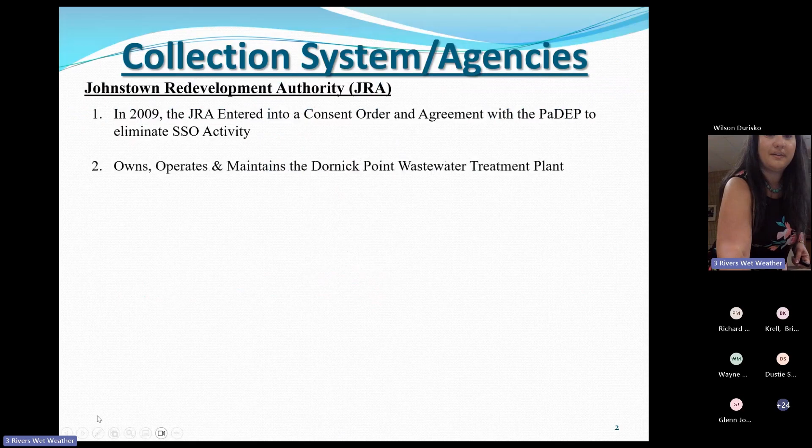So the first few slides will give us an idea of the makeup of our system and where we are. The beginning talks were in 2009 with DEP. And as Dave mentioned, although we're a redevelopment authority, we're also Johnstown Regional Sewage. So as of today, there are 21 municipalities that flow into Dornick Point. Whenever we think about working within the communities, obviously everybody has different demographics, different political makeup, and we had to work very diligently with all the municipalities in order to get everybody on the same page. And that took years. That wasn't something that happened overnight by any far stretch.

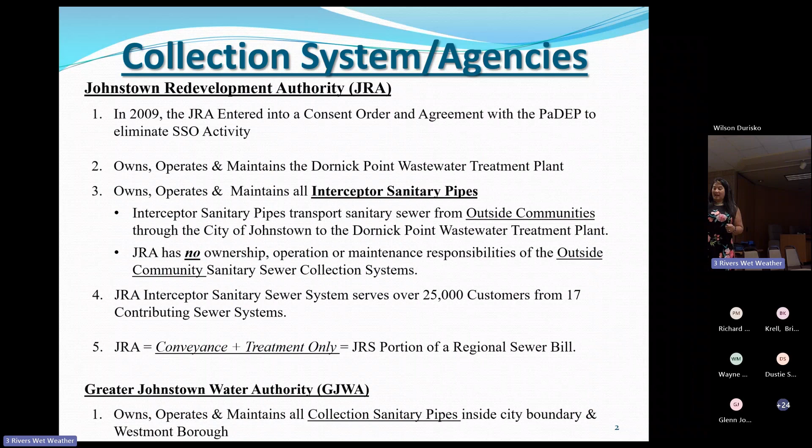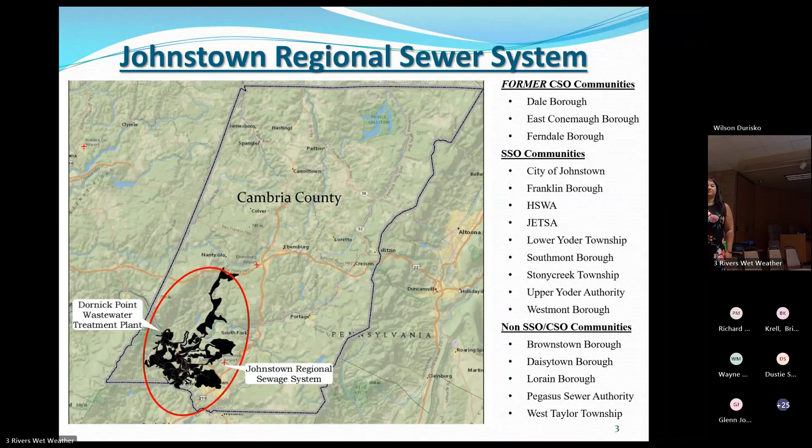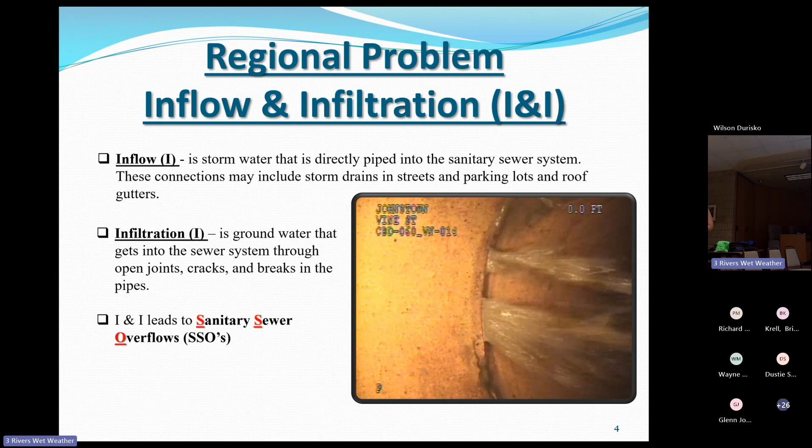So obviously the largest issue was the I&I. We're, a lot like a lot of your municipalities here, an old steel town. We had outdated infrastructure and just a lot of the lower demographics as far as household income. So we knew going into this that this wasn't going to be a simple task by any far stretch.

So whenever we think about the rain events, if anyone is familiar with Johnstown at all, whenever people say Johnstown, they instantly think floods. So first and foremost, with our residents, they're skittish of water to begin with. They have a lot of questions. We never know what to expect from week to week, month to month. And the rain events not only have caused issues in the past, but also have caused many issues through this project.

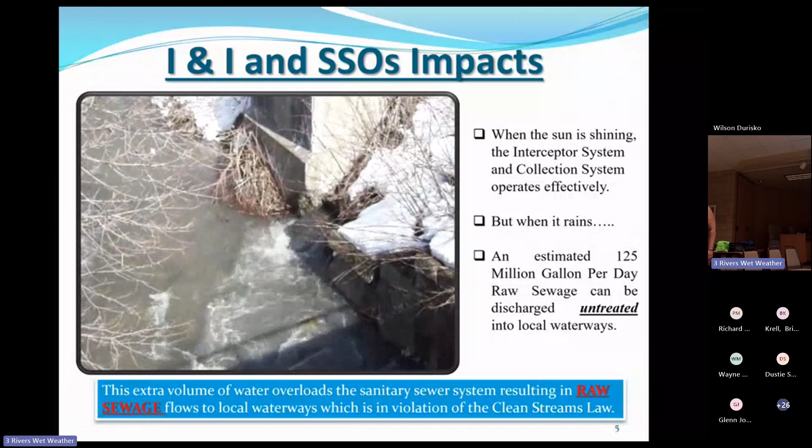So whenever we originally started with the consent order, the authority was the first group to sign the consent order. We worked with not only DEP, but with the member municipalities to all have their own individual consent orders, which did help immensely through this process once we were 4, 5, 6 years into it.

We had many public meetings that helped us a whole lot in order to get the residents on board, just to start to understand what this project was. Many of our residents, it's definitely different today, but at the very beginning, no fault of their own, they just didn't understand the process. They basically didn't know the difference between a storm and a sanitary line, or where the lines on their property went. Obviously, we were facing very large infrastructure projects, which caused issues just with travel from point A to point B.

We basically didn't go in painting a rosy red picture when we met with our municipalities. It was more, look, there's going to be a whole lot of issues and collaboration that we're all going to have to work through together. And I think a lot of that was successful from the word go, because we did sit down with our engineers, we sat down with the general public.

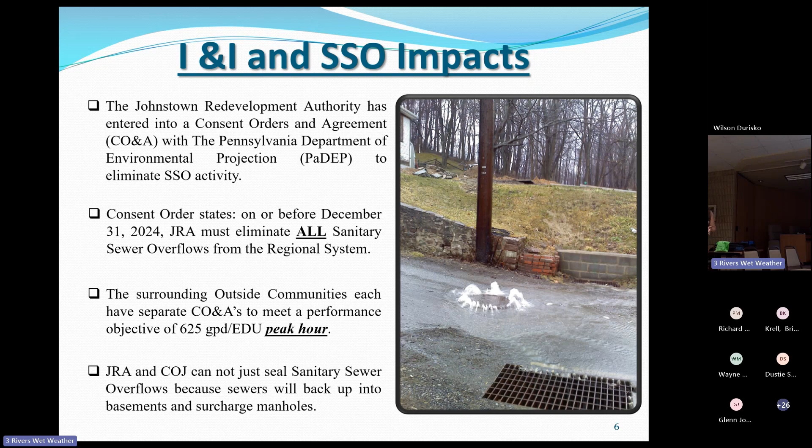Open lines of communication, newsletters were sent out. And some of those situations created more ugliness, because let's face it, sometimes the more knowledge we give, the more critical people can be. So, but we don't regret doing that. A lot at the beginning was very helpful just in providing the proper knowledge to our residents.

Throughout this process, and I'm sure all of you are doing the same thing, there was a whole lot of flow monitoring. Obviously very costly, but very worth it in the end. We were able to truly show where we were at the beginning of the project. DEP did ask in the consent order for us to flow monitor for a year. We monitored for 10 years and just halted that flow monitoring 2 years ago when mainline work was completed.

Now, since then, we actually did install 8 monitors at our SSOs, or we have 8 remaining SSOs, just to see the progress that was made, where we are today, and just to see how much more work we have to do.

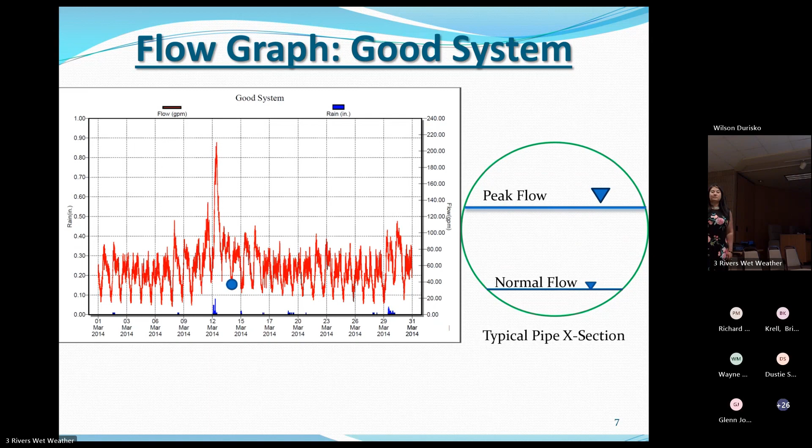So basically, at this point right now, we are fined a minimum of $1,000 a month through DEP whenever we have any gate closures at the plant, which at the absolute most, I think we've had 4 in 1 year. That also created the additional $1,000 fine for us. But DEP has continued to work closely with us to alleviate those issues.

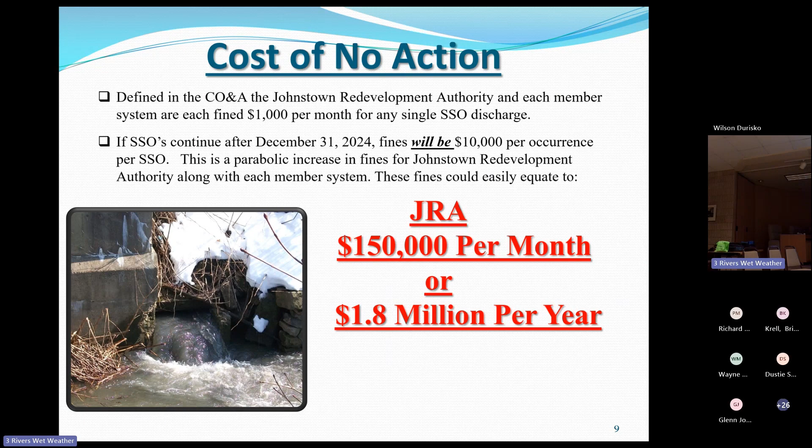But while we were presenting to the general public, we had to use these numbers. This is factual information that if we don't meet the DEP consent order, we could be facing these dollar amounts. And obviously, these numbers speak volumes whenever you're dealing with your residents and with the smaller municipalities that have fiscal issues, regardless of fines and mandates.

So we obviously did a whole lot of mainline work. At this point, just at the authority and PENNVEST, we have wonderful working relationships with PENNVEST. They've helped immensely through time. And whenever we talk about our private laterals, we had many discussions with PENNVEST also as far as funding sources, which once again, we'll talk a lot about at the conference.

But for as much as they were able to help on the public side, a lot of the red tape on the private side, we didn't feel was going to work for our residents, just based on prevailing wage costs, everything that goes along with PENNVEST dollars, which is why we had to be a little bit more creative.

But whenever we think about just what we were up against with the public versus private, there were times where a fourth of the city was under construction. We had 3 and 4 different construction projects all going on at the same time. So whenever we think about the frustration of our residents who are, in the city of Johnstown, your normal commute to work is 3 minutes, 5 minutes tops, just the traffic side of it, the construction side that took place, there was just a whole lot of tension on the project.

It was just everything was viewed as negative at that time. Now, all these years later, we do see the positives. We don't have manholes flipping during rain events. We don't have flooding in people's basements. So whenever I think about those initial discussions with the residents compared to where we are today, I know it seems like it takes forever to get to that positive end result, but we do notice that through the process with the public versus private work that we are seeing that.

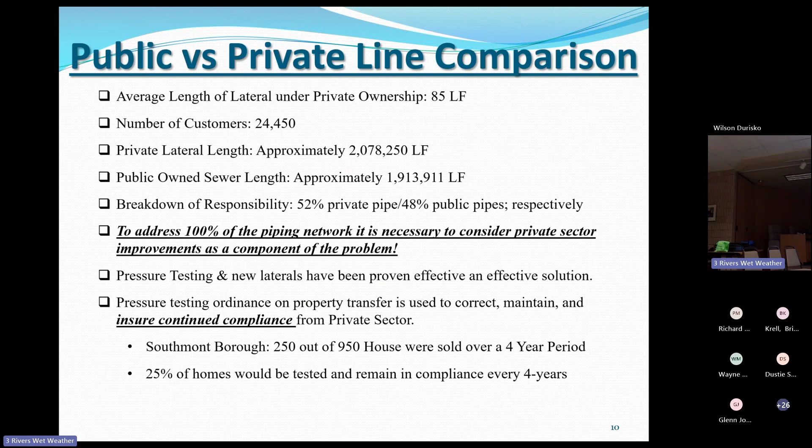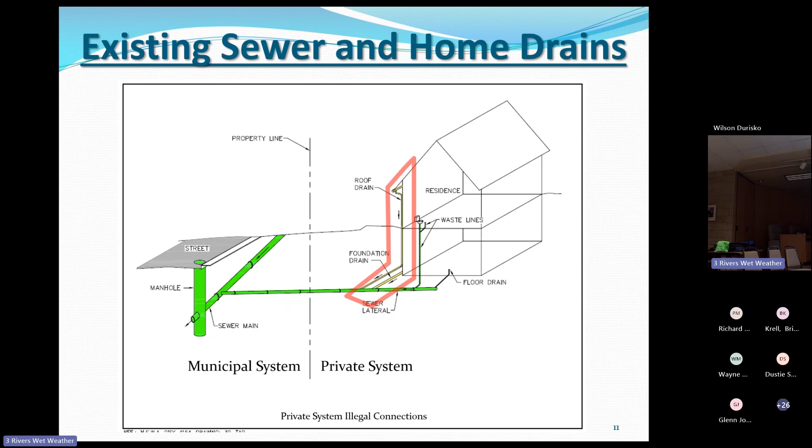So the next few slides are just a few different drawings, more generic drawings that we use with our residents. A lot of them were confused about the process, didn't understand. They thought they were going to have to dig up their entire basements, or change bathrooms on the second and third floors of their homes. It was a very ugly message at the beginning compared to what they actually had to do.

So we use these drawings a lot to explain what they were up against, what they had on their properties themselves. Another conversation I had with Dave is how we use viewports through all of our projects, which is the connection point between the private side and the public side. We did things a little differently based on the municipality and what their engineer wanted to see, but all of our projects have a viewport either at the property line, or for some municipalities willing to fund it, 5 feet from the foundation.

So we use that with all of our programs and municipalities as the point of public versus private. Going back to that last slide - is it the norm for communities in your area to say the public system runs to the property line? Unless the viewport is that 5 feet from the foundation and they have an easement.

So the municipalities where their governing body voted to give that additional 5 feet - a lot of the municipalities where parcels could have had an additional 100 to 120 feet of private lateral work that they wanted to assist with funding, the property owner had to sign off on an easement. Then the municipality is responsible for that portion of the line to the viewport. That was helpful to many homeowners who didn't have to deal with excavation costs to reach the property line, but they had to sign that easement.

Obviously, that was a lot of legwork for the engineers and the municipality, with a lot of absentee property owners being an issue. We also had decisions to make with vacant properties - do we want to take the expense of installing this viewport? On one project specifically, I ran the numbers on labor and materials to install a viewport, and it came to a little over $2,000. So with 200 vacant properties, you had to think about whether it was really worth it.

Now, here we are 10 years later, and I'm thrilled that most of the time we leaned toward installing them. We've created a land bank in the city of Johnstown and Cambria County, which has really brought a lot of vacant properties back into reuse. So we're thrilled we had that option, that we didn't just cap those lines and keep moving based on the idea that there was no hope for those structures.

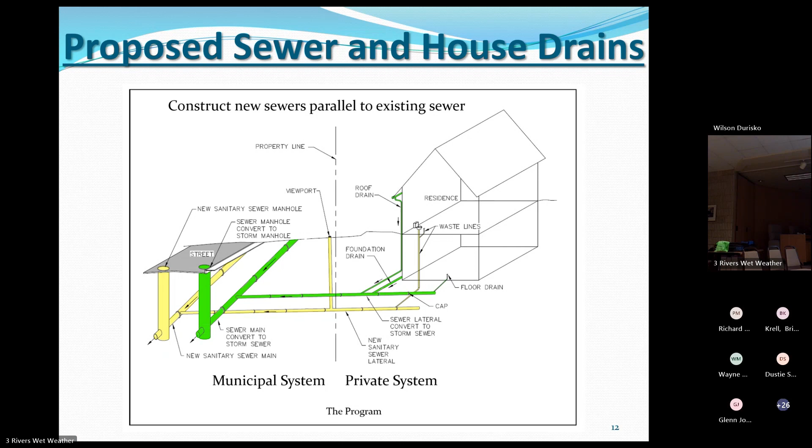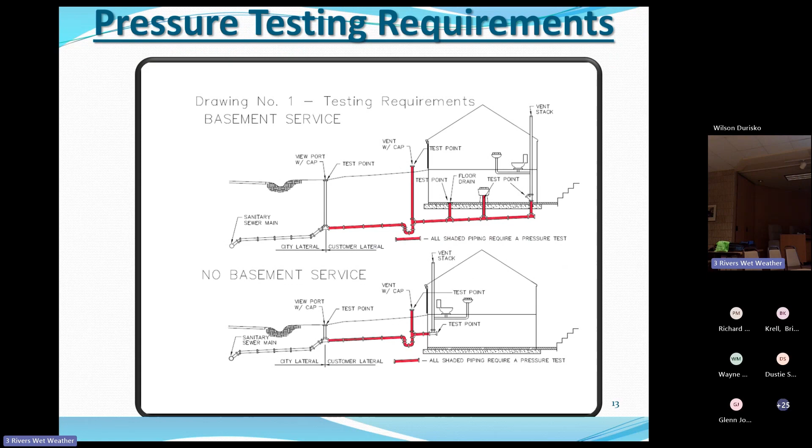Whenever we talk about pressure testing, we started at the very beginning with dye testing, and then we had smoke testing. We did every type of testing to try to confirm that pressure testing wasn't the do-all end-all, but it turned out in our coverage area that there really wasn't much option other than full pressure testing. You'll see with this one slide just how important it was to get everything pressure tested under slab.

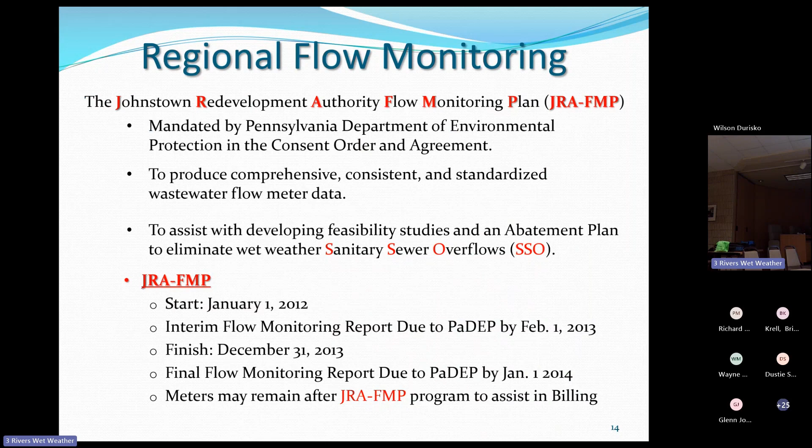This gives an overview of the flow monitoring - what DEP mandated for us to flow monitor, and what we chose to do moving forward. The reason for flow monitoring is it was one of the ways we were able to work with our ratepayers truly in our system on their monthly treatment bill. We created a billing system to reward property owners who were pressure tested under slab, so they had a decrease in their monthly bill once their property was in compliance. The options we gave had a lot to do with flow monitoring for each municipality.

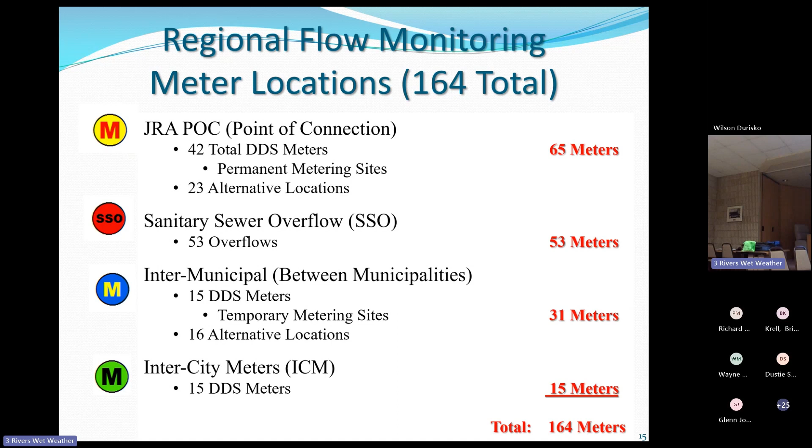While she's doing that, just as some context, we were talking about the number of meters within our region, and multiple hundreds of meters is definitely something to consider, multiply everything you see by 400s, that kind of thing. We obviously have a much smaller system than what all of you are dealing with, but we were at about $200,000 a month between engineering costs and the flow meters themselves. It obviously was worth it to be able to show where we are, but it was definitely costly to the authority. Worth it for sure.

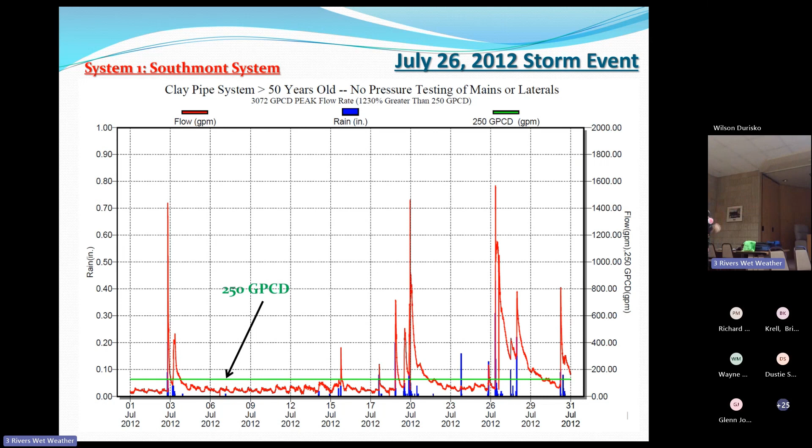So these next few slides are going to show systems with storm events prior to being pressure tested. You'll see the description right under if they were still the old clay terracotta systems, how many years, whether there was any pressure testing of mains or laterals. Pay attention to the green line, which shows the compliance level we needed to be at. It's pretty amazing to see where we were in comparison to where we are today. This is one of our smaller municipalities that right now is 100% pressure tested. Prior to completing their mainline work and private laterals, you see the spikes during rain events.

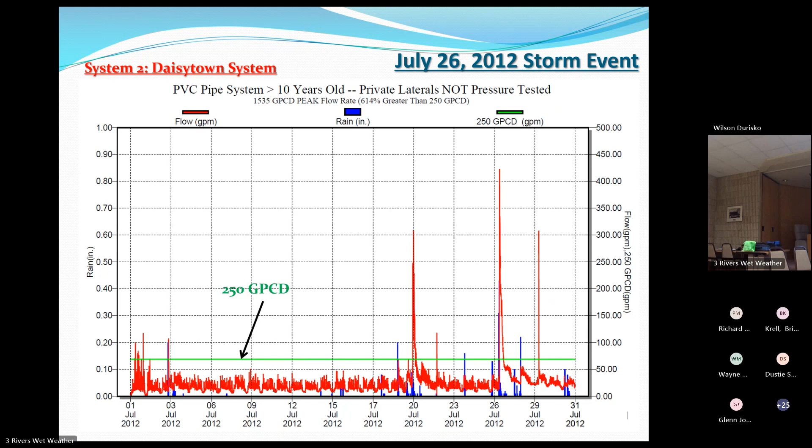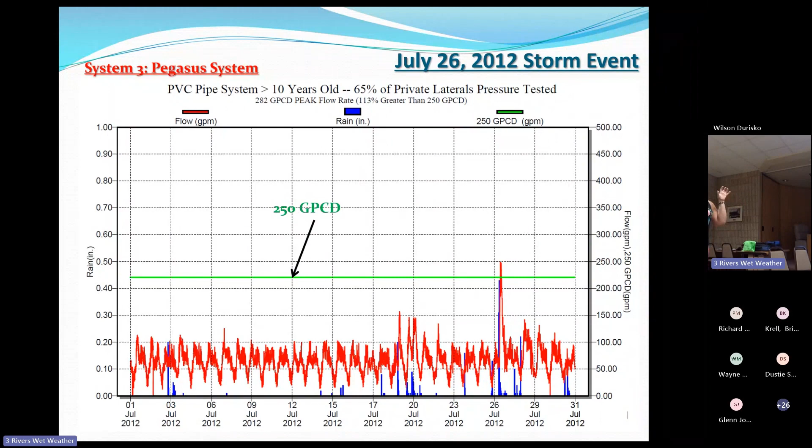Just a quick question on the storm that you're picking to make the comparison - is that something you guys decided on, or was it that they were major rain events? Normally it's within so many inches of comparison between the work that was done and after. These were just the originals from whenever we started the program. You'll see on future slides the amount of rain per each rain event. What I chose was the ones that were closest as the rain event prior to the work and then after.

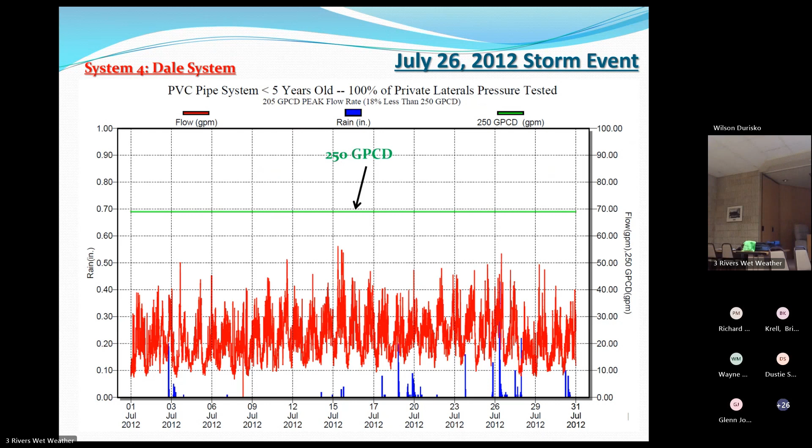And by all means, I'm sure they wanted to exhaust all options for their residents, and obviously not have to do the work on the private side. A lot of our creativity as far as funding for our residents came from the public meetings of the unfortunate situations that people were placed in.

I'd say the average cost to get the work done in these homes was approximately $4,000. Now some could have went down to $2,000, depending on finished basements, things like that. In some of our surrounding municipalities, not in the city, the project itself would go up to $8,000 or $9,000 on the private side.

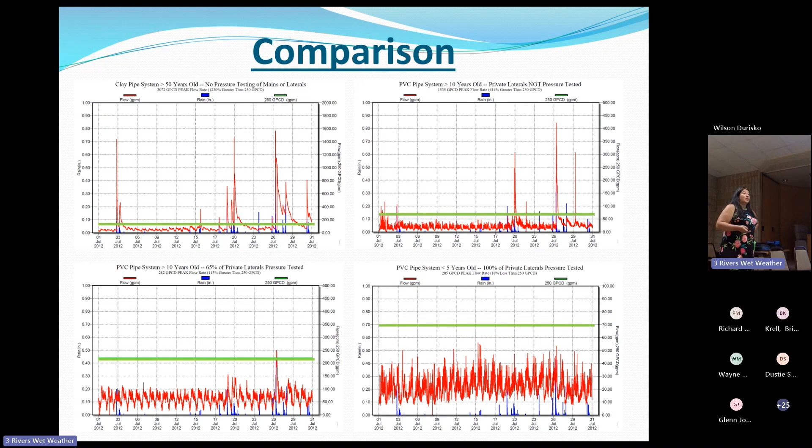What did the stormwater— I'm sorry, if they were lined, was there a separate stormwater installed? Correct. So we did have a pretty strong stormwater system going into this.

Through the project, there were areas of town where we installed brand new storm systems that we didn't have prior. We were also able to update our storm system that was already intact, once again while we already had excavation in place. And we paved curb to curb through the whole project.

Where PENNVEST is willing to fund the 3 feet on both sides of the trench line and the trench line itself, we increased our rates in the city of Johnstown itself, not the surrounding municipalities, to cover curb to curb paving through the process. Although it was a cost increase, residents were more welcoming of the project in their neighborhoods knowing that streets that hadn't been paved in 20 or 30 years were now being paved. So at the very beginning it was very rough, and by the end people were more focused on the positives rather than the negatives.

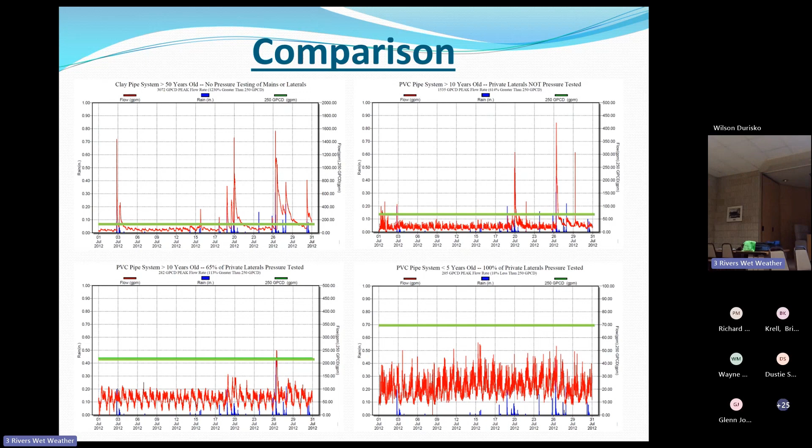That's why it was, for as frustrating and costly as it was, worth it for the graphs—and I have more here. I'll gladly share any information we have. It's almost like if you know your system so well, you actually saw it happening, where we had so many issues with flooded basements on certain streets and basins. Then the next year rolled around, during rain events in spring and fall, it was actually exciting to see it happening as well as viewing the graphs.

So whenever I was asked to talk about the different types of testing, as far as what got us to where we are with full pressure testing—this is Daisytown Borough, but pretty much every municipality followed the same suit. They all tried to never get to the point of pressure testing under slab. But this is just the results of each type of testing in this very small municipality of Daisytown, and you saw with the slide before how many spikes there were.

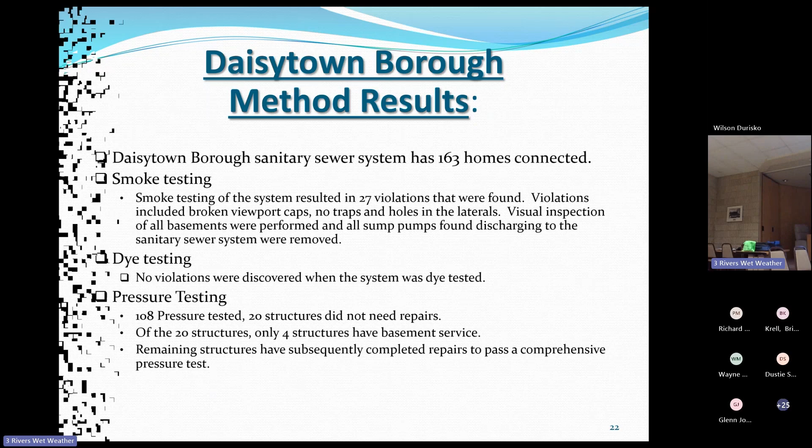Did any residents complain that the pressure testing caused cracks that weren't there before? Yes, we've heard every complaint you could possibly imagine. People have said their toilets have shot off on the third floor of their house when there was nothing connected. We've absolutely heard it all.

So how did you do that? How would you go in and seal one end of their system, at the viewport, and how much pressure would you put in the line? 0.25. Okay, yes.

So what we do is we also have property owners who insist they're going to pass before they're ever pressure tested. So we have a $75 fee if they just want their property pressure tested, to see with their own eyes that the pipes are not going to pass the test. We've provided every opportunity to residents we can to make them feel more comfortable. At first there was no charge, but then everybody in town wanted their properties pressure tested, so we started to charge—people still do it. At the very end of this I have a chart from 2015 of all our municipalities showing how many properties were pressure tested compared to where we are today. It's very helpful.

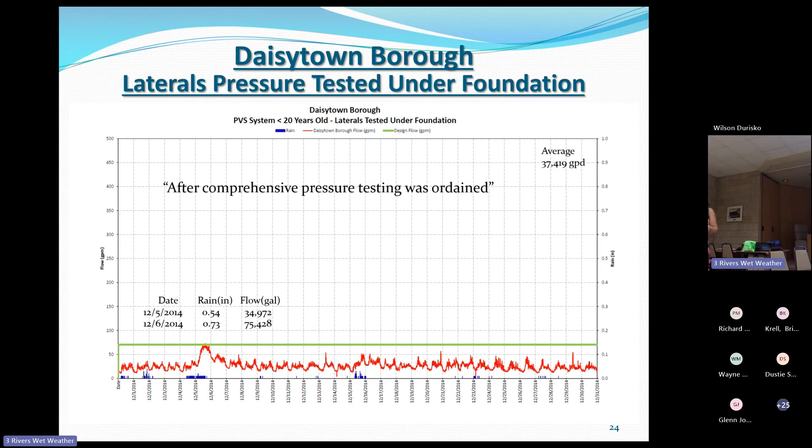So we have a program that we're going to really dig into at the conference, called our sewer lateral compliance program. We have a representative of JRA who goes into the home. We actually provide contractors for this type of work, and we fund the projects.

At our pre-bid meetings, we have a representative of JRA with the property owner and all the contractors. It's almost like a mini infrastructure project that we go through the whole process with the residents.

So many do not want sump pumps. Sump pumps are the biggest issue - they don't want them, they're noisy, they're this, they're that. I'd probably say at least 10 to 15% of the time, we end up going back to the house months after the work is done and installing sump pumps. So they don't want it at the very beginning of the process, but by the end of it, everybody's on board.

I have a question - have you run into the issue where when you're redoing the sewer under the house, you have to install sump pumps because now you've got the problem where the water that was going in there...

Correct. And how do you stop water? So if you seal that pipe under the floor, what's to stop the water from coming through the walls and going across the floor?

Yes, and between the contractors, the property owner giving us the history of the property, and our representative from JRA - which if we need to, we do call in our engineer for certain projects - between French drains and sump pumps, if they'll listen to us, because ultimately they are paying the authority back. We have numerous grants that can help people at low to moderate income, but the way the loan program is set up, they have 20 years to pay us back at a very minimal cost, but it's still their dollars. So if they choose to not want that sump pump or the French drains, obviously it's their home - we don't overstep.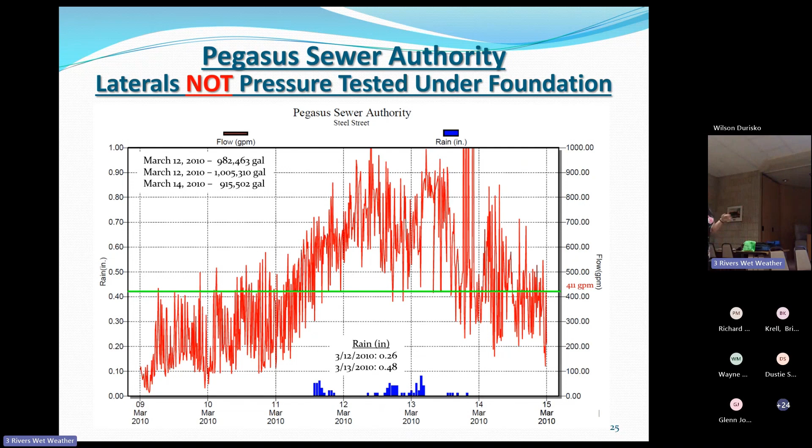Pegasus, same situation - whenever you see dates, rain flow and gallons prior to pressure testing, and after pressure testing.

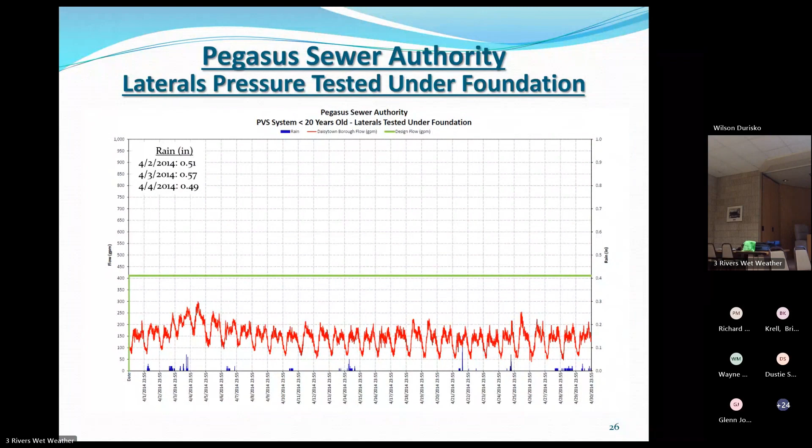So this just summarizes the different systems, more of just what I've been talking about here for the last few minutes. This is just Tom's summary of the I&I, the SSOs. I just had him draw up what his ideas were in summary.

Basically, you don't eliminate enough I&I unless you pressure test.

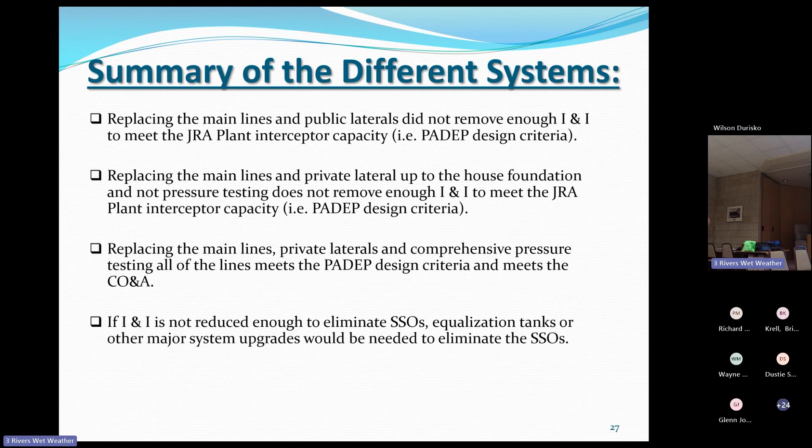If you're pressure testing it before, how do you stop the toilets and the sinks? Balls are used at each area and in the basement. In a lot of the basements, we've been able to run them above grade, where whenever the homes were built, they were below grade.

Whenever we see that, I'll show you these pictures real quick. They're right here.

At the very beginning, there weren't any municipalities that said we're just gonna do this. Like you and I had spoken prior, the video was the beginning. The biggest issue is the video, the smoke testing, the dye testing. I think we could be used as an example in Johnstown - don't tell your constituents one thing and then two years later upgrade it.

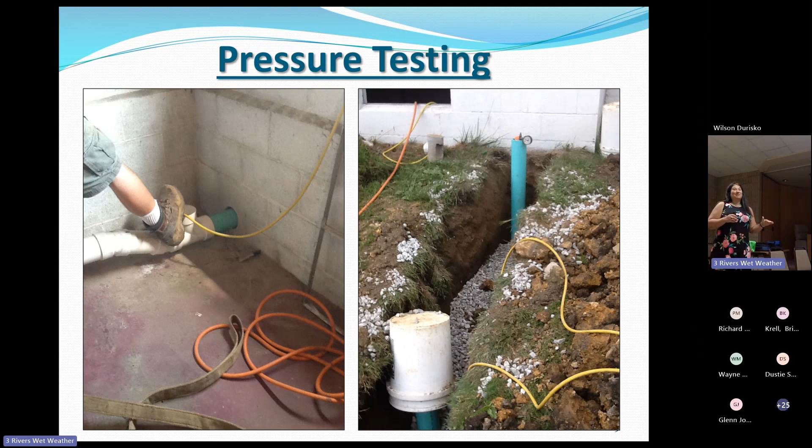Now the municipalities that have just joined our system within the last two years, they're going directly to pressure testing - you'll see that also at the end. The ones that have been part of this from the very beginning, it wasn't an instantaneous response of just because this worked in Johnstown, Westmont, Brownstown, Daisytown, Dale Borough, that we're gonna do this. That's how we got to where we are.

So on the left-hand side, this is where the terracotta pipe was once underground with the elevations, with the property owner. Sometimes they'll have a random setup, especially in our homes - the old Johnstown steel worker and coal miner homes that just had a random toilet in the basement, because whenever you'd get home from the mill or the mine, you'd go directly into the basement to get showered.

They'll say we haven't used this toilet in 20 years. Well, do you want the toilet? We obviously recommend keeping it, but nine out of ten people don't want them - they see the cost of that type of work, so they'll say to eliminate it. That's where there are some examples where we're able to run some of the lines above ground rather than jackhammering up the basement, which obviously eliminates cost.

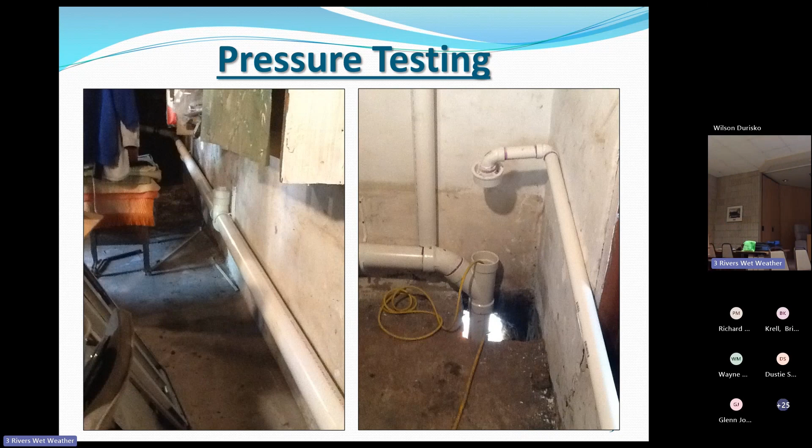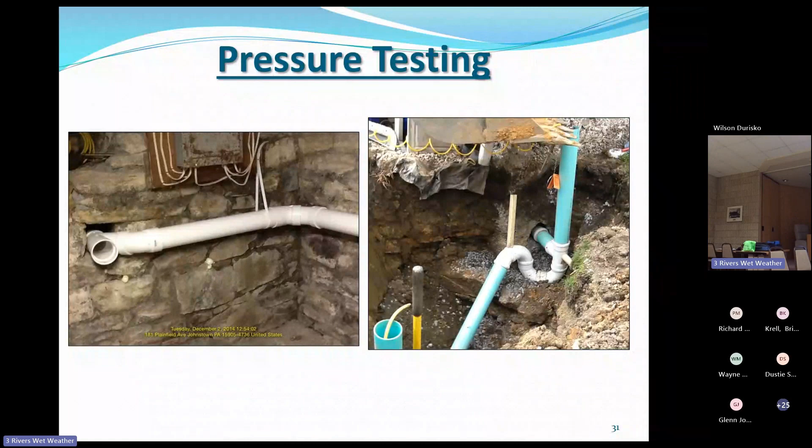I'll just click through these. If anybody sees anything or wants me to stop, just let me know. I just wanted to show some examples of what we deal with - try to keep everything as neat as we can for the property owner, and replace everything the best that we can for them.

Did building codes permit you to put exposed lines in the basement like that? Yes. And the way we were able to get around a portion of it, per city code that was not going to allow it, was - this was actually during the manager we had in '13 and '14 - we showed it as a more cost-effective way for the residents, as we eliminated the permit fees for the sewer work to be done. Therefore, as long as you followed the building code for the state, it wasn't what was actually implemented through the municipalities.

Which is a little different here with Allegheny County - we have plumbing code, plumbing division of the health department, so there's a little difference there. The only portion we obviously had to follow was for commercial buildings with master plumbers. It had to be a city-certified master plumber to do the work in commercial buildings, which still caused problems, but we couldn't do that - we had to follow it.

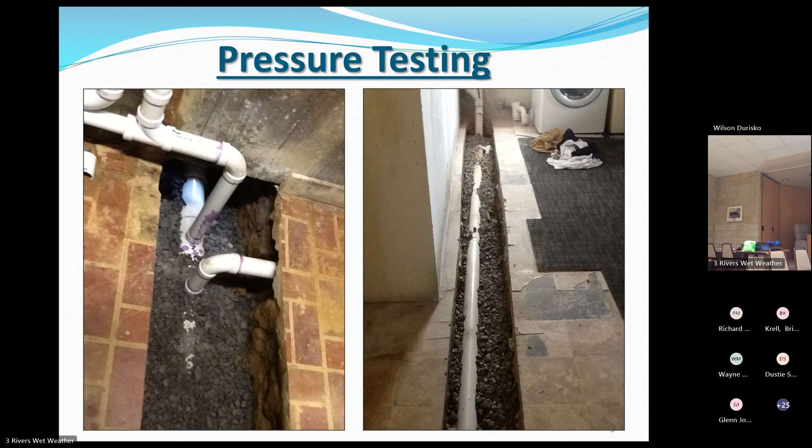On the maintenance side of their bill, almost every municipality is surcharging residents who haven't done the work. Some municipalities are surcharging $100 a month to people not in compliance. The authority always wanted to be the friendly neighbor and never have a surcharge, so we created our rates based on a decrease if you're in compliance, not a surcharge if you're not.

So your rates aren't based on any water usage? Yeah, no, which is a foreign concept. But we figured out where we had to be.

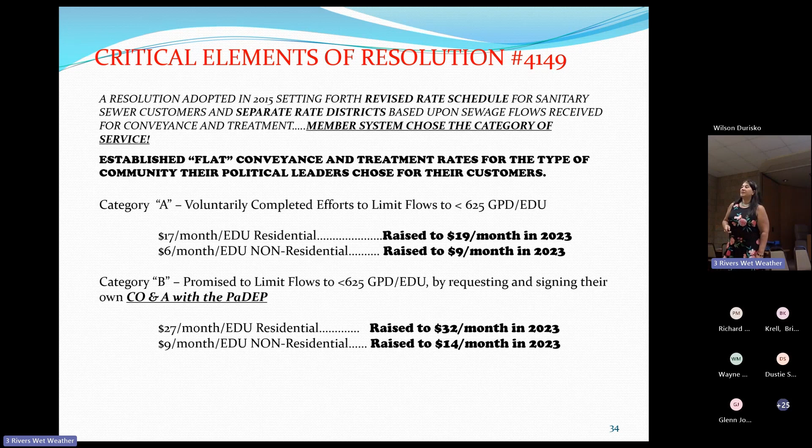Are there any areas that do not? So you're totally a separate sewer system, right? Correct, we own the interceptors. The surrounding municipalities have their main lines that feed into our interceptors at the border to the city of Johnstown. But the system itself doesn't have any permitted combined sewers. No, it does not. And that's a key difference, because at this venue we've stated before, and everyone shook their head, we're all hybrid, meaning combined and separate, with permitted combined sewer overflows and things like that.

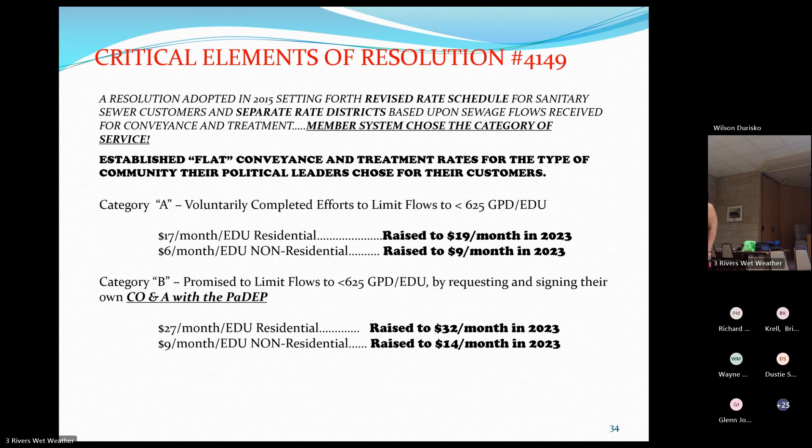That's another difference between the Johnstown project and their wet weather efforts that are doing fantastic in the ALCOSAN service area.

You showed the 625 gallons per day figure. Is that for a particular storm, or was that defined? That's what we're supposed to meet for every day, for any event. Whenever folks reach out to us, they always ask if DEP mandated that. They did not. DEP told us where we have to get to, the 625, but they never said how to get there. So this was our creative way of learning the processes and the work we did to get to that point.

So this last April, during the wet weather, we had one gate closure at the plant. But what about throughout the system? Were there SSOs that activated, or manholes that just overflowed, not constructed SSOs? There were 4. We activated 4 during the rain event in April.

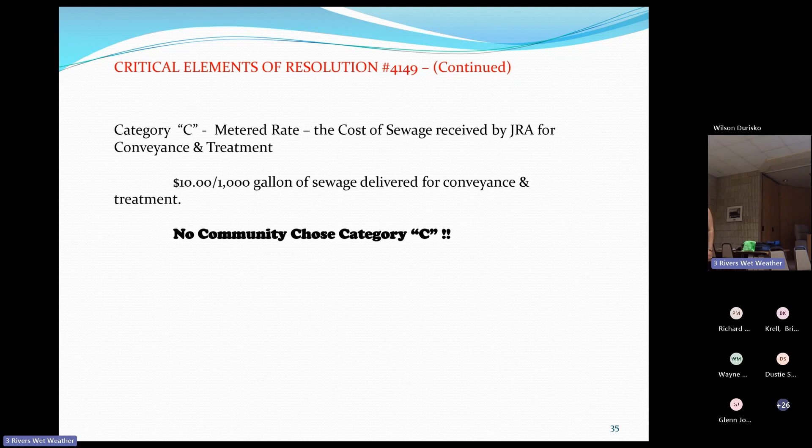Those were 4 out of our constructed SSOs, not manholes just overflowing. Like whenever the gentleman in the back asked me about the flow graphs, you actually see it from point A to point B. Before, every time we had major rain events, we were driving from point A to point B just to see what was taking place. It just doesn't happen anymore. We still have some municipalities that need to get on board to close off the remaining SSOs, but we don't want to cause issues for our city residents who have met all the criteria because surrounding municipalities haven't completed their work yet, on the private side, not the main one.

So this explains the residential rate calculations, where we were, where we are, and how we decided on it. We had HRG do a rate study for us in 2023. That was the first time we had increased rates through the project.

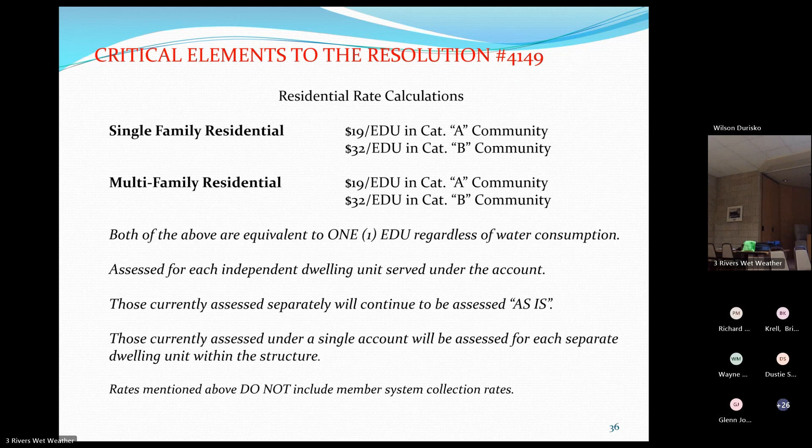So whenever you asked if any of it's based on water usage, the EDUs are for the commercial dwelling units, but as far as residential homes go, it's just the standard flat rate.

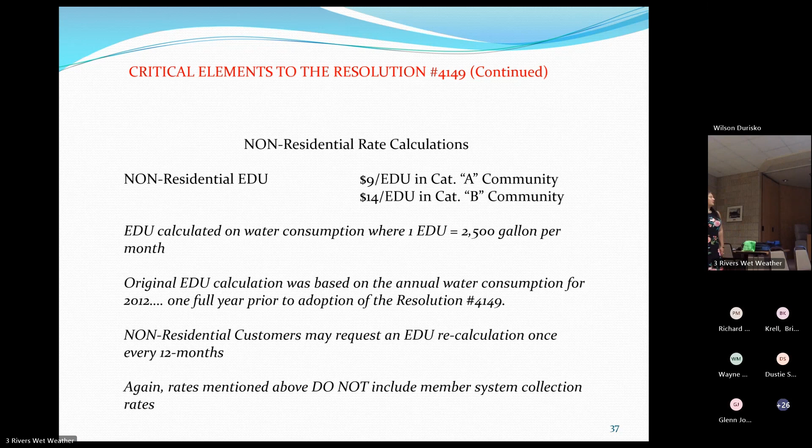This is just Tom's engineering expertise with numbers.

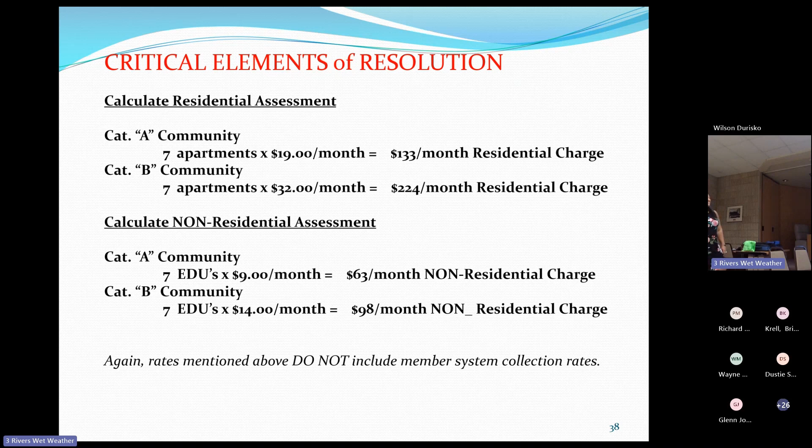When we do the pressure test, I did step out. I understand, you go into the basement, you block it off at the lowest point, the water closet, right? How do you determine if there's under-draining, since it's all blocked off so it doesn't hold any pressure if there is?

So this is post-construction. The majority of the pressure testing is done post-construction, with every area sealed off for the test. Most contractors will do the outside work first, pressure testing the outside private line on the property, then the inside. We have an EADS inspector on site, we contract with the EADS group, along with the contractor and the private property owner.

You don't pressure test before. So that's what you said, I pay $75 to say I don't have anything illegal tied in. Correct, so it's presumed that's essentially what's happening, and you're basically told you need to go disconnect your footing drains and any other illicit connections, because of the work already done with the dye testing and the smoke testing.

Through our GIS system, we have the results of the smoke and dye testing for every property. So the initial conversation with the inspector on site is to go over that information with the resident. What type of dye testing was that, with the rain spouts and a lot? If something really showed a red flag, they would request to go inside the homes. I was wondering about foundation drains, since that typically won't show up in smoke testing. If it wasn't dye tested by flooding the ground, you're not going to see that either, but that's obviously one of the biggest sources out there.

So that slide is key, and speaks to your question. If I'm a homeowner in municipality XYZ, and my municipality didn't pass a mandatory resolution to have everybody go through the process, but I did so voluntarily myself - once I comply with everything, I get the lower rate, irrespective of what my municipality does. Correct, that's a key element to the resolution.

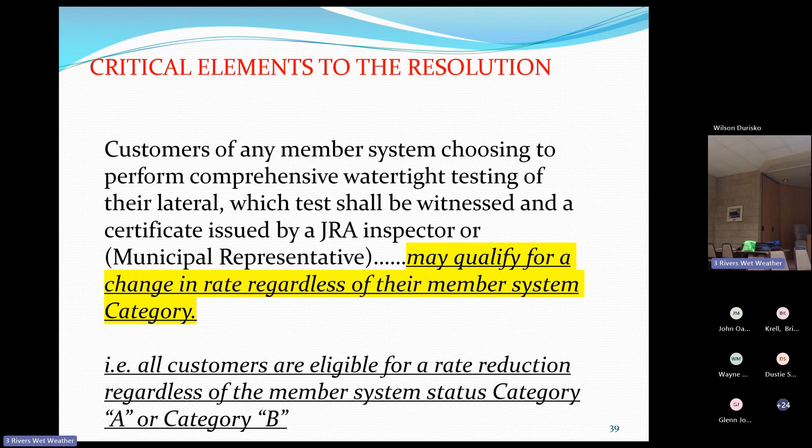So where are we today? These are the charts I kept referring to. In 2015, this is where we were - 28% total, that's the number we focus on at the authority. We provide this data to every municipality on a monthly basis, just to show where the remaining portion of the coverage area is, sometimes just to show people to be a better municipality.

So again, when we see that it's been pressure tested, it means someone's done rehab to their home, and that's just the confirmation of that.

Correct, yes - Brownstown only has 350. Oh yeah, there's some very small municipalities. Daisytown is the one I used as an example. So I thought Allegheny County was bad. Oh no, if you even say the word consolidation in Cambria County, everybody wants to twitch. Yeah, in Pittsburgh we talk about, oh yeah, 160 in Daisytown.

So you see these numbers - Daisytown, Dale, East Conemaugh, and Jackson East Taylor were the municipalities that were close. Brownstown was very close at the time. But just use the city of Johnstown - 774 in 2015, and we're at 28%.

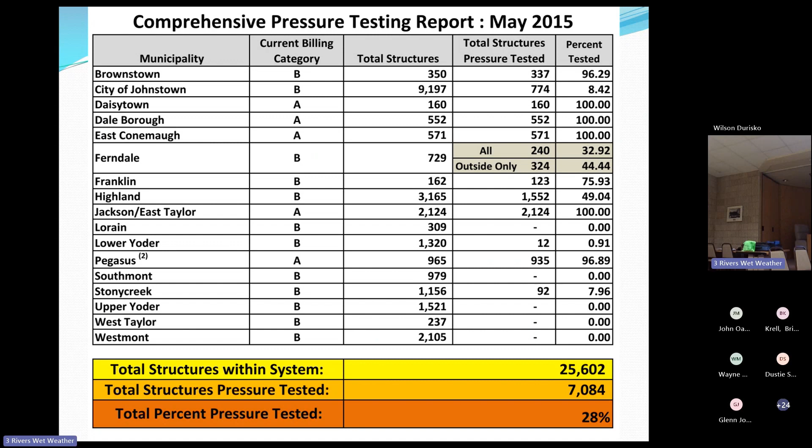Now here we are today - this was last month's report.

Have you run parallel sewers in all of those communities? Yes, we had the majority of them. So the foundations, however they're being disconnected, those can be tied into the municipal storm. Yes - when you run the new sewer, you leave the old sewer in place, you're just running the new sewer to sanitary fixtures, whatever's there from before stays and goes to the old sewer outside. Correct, and in areas where they didn't have a storm, we used the sanitary as a new storm, and now there's a new sanitary. That's the parallel approach we've talked about at this venue for eons.

This is not everything - what if the community already had, like the front of this house, a separate sanitary and a separate storm? You didn't construct yet another - no, not if there already was one. That's where if they already had a storm and a sanitary, the storm was still the storm, just making sure all the drains, all the downspouts, all the water that was to be directed there, if you found a home where from the street to the house there was just a sanitary lateral...

So if you found that had illicit discharge, how did you separate that? They had to fix it whenever work was done on their private side. So did they run a line out to the storm sewer? Correct, and we eliminated it, or just ran it to daylight - they could also run them just to daylight. A lot of people did small scale fixes, cut off their downspouts, ran extensions just to get to daylight - at least run them to daylight, just not into the sanitary system.

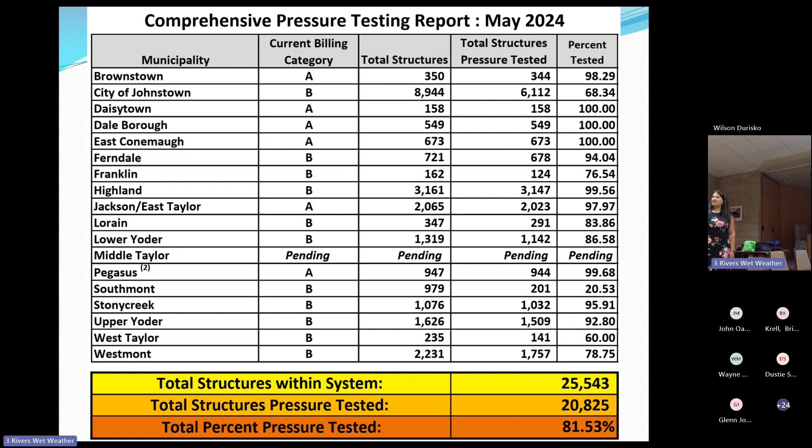Do the majority of municipalities not have full storm systems here? Well, it's like - yeah, they do, yes. I think it's a mix, because of the topography, there's lots of places it could sheet flow over a hill and go into a pervious area, so there's not necessarily a dedicated storm going down every street.

When you look at our region, think about it - the suburbs probably have the separate systems. These towns that are closer to the rivers, the older ones, have the combined systems.

By the era they were built, that's just the way it was. But even if it's separate, that doesn't necessarily mean there's a dedicated storm line going down every road too. I think that's the unique part, even in the separate sanitary system. Because of the topography, there's many places where you have a dedicated sanitary line, but there's no storm sewer to discharge into. Now, the topography might put it in a valley, and it may be okay to go down there.

You mentioned we have a bunch of different scenarios that run through an option. These examples, I think, would be very helpful for us, for individual homeowners. Do you guys have anything put together that lays out different unique scenarios?

We don't, but I think it'd be nice if we could put something together, working with you, with actual examples on paper. Here's a normal scenario that you went through, here's how the process worked, here's the cost associated with it, here's how it was paid for, here's how it was handled with them. Or, hey, here are the difficult ones, some weird scenarios we went through. I think that'd be very helpful.

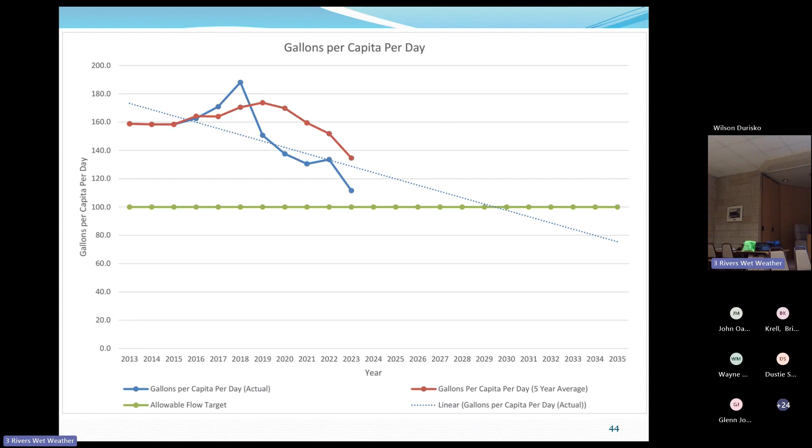Just to finish things up here, this graph was presented to our board in March, to show where we started and where we need to be. There was that terrible rain event, I think it was '18 or '19, where you see the spike there. But this helps us see that what we're doing is worth it. And what our engineers are saying is that, following the path we're on, hopefully we meet the flow requirements and have everybody in line by 2029. So it's been a ride, to say the least.

Was that the authority's requirement or in your consent order? Yes, 100 gallons per capita, that's an annual average type of thing. Actually, with our consent order last year, because so many of our municipalities asked for extensions, DEP gave us a 2-year extension that we didn't even request, because at this point we need to seal off those SSOs and we're done, based on a consent order.

We just don't want to do that to those properties that would be affected. Right now, the last discussions we had with DEP were about the 2-year extension they provided without us requesting it. So you don't want to seal those off because in a bad event you're afraid of what they'd cause? Yeah, that's sort of what we talk about here, you want to keep it open for that catastrophic event.

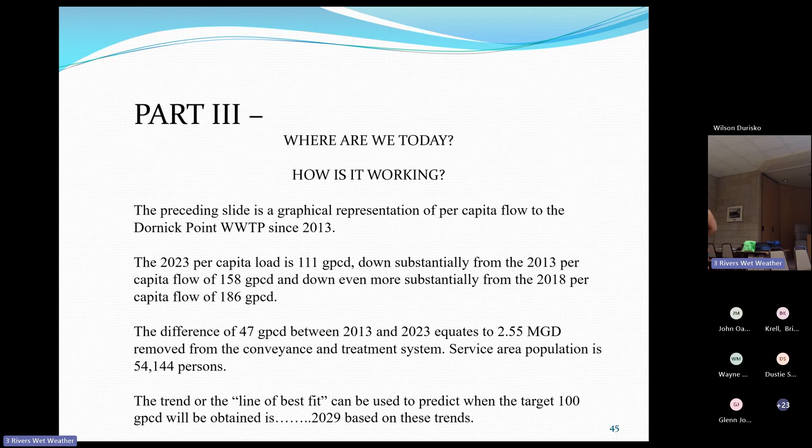Yeah, so it doesn't go into people's basements. For sure, and we want to talk to DEP about that. We actually have a meeting requested with them right now, just to say, is this something we could monitor the flow on, is it something we could permit these SSOs for? Just to have some discussions and say, in case of an emergency, can we at least have them available to us? We'll gladly follow whatever criteria you want to see moving forward.

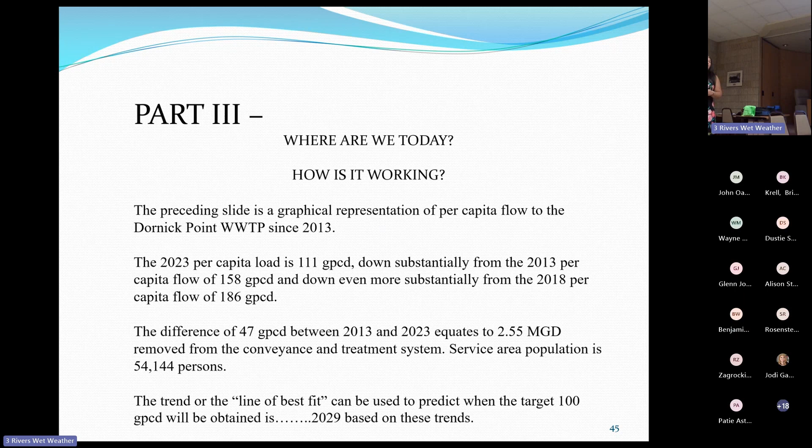Can you talk a little bit more about your GIS program and the mapping that you have in your system? Is it entirely managed by you, or are municipalities sending you their data? How are you keeping such an up-to-date method for mapping house by house?

Sure. The majority of the work is done through our engineering company. We also have a subcontractor that works for the authority for GIS. There's never too much data, so we expect all field notes and any changes in the system to be uploaded. Every type of work done - where we lack is if it doesn't go through our programs on the private side, then we don't have their information. But all of the work that goes through any of the funding programs we provide on the private side, we have all of their information as well.

So the majority of it is based on engineering inspections - whether it's a pressure test on the private side or a pressure test of a new manhole or line installed. We have our inspectors there who know that all of that data needs to be uploaded on a weekly basis. We have a read-only version for all of our employees and for the folks in our system.